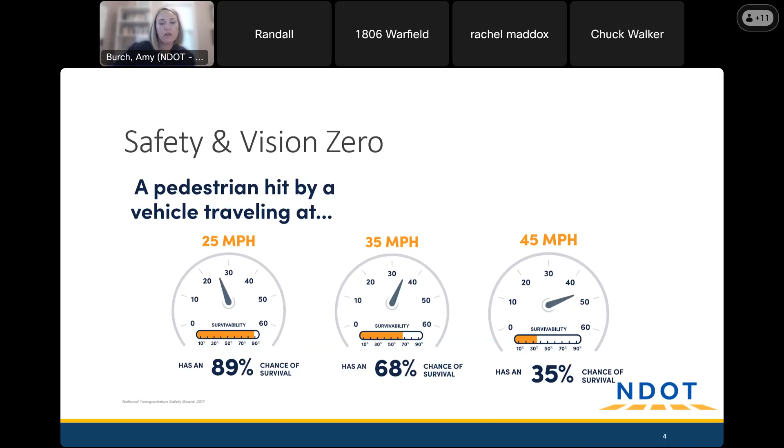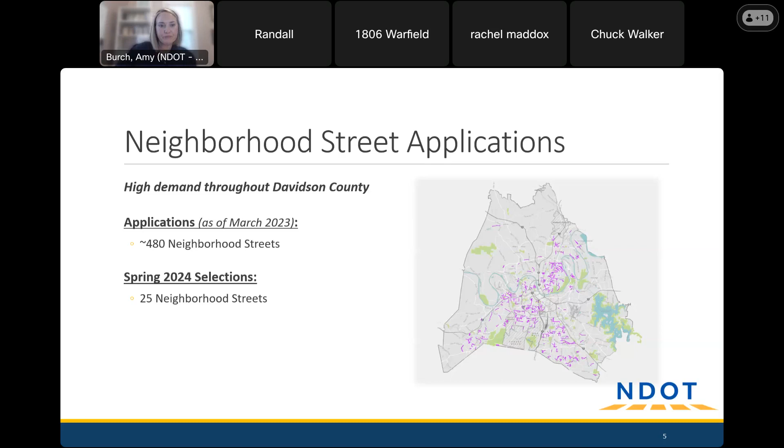Outside of the traffic calming program, we like to direct people to the Hub Nashville. If you're not familiar with it, it's a really great tool and resource for citizens to reach the correct department to address service issues, things like your trash didn't get picked up, or a street light is out, the storm drain is clogged and needs to be corrected, or a sign's been knocked down, things like that. It's a great way to reach the right department. It disseminates that information and gets the service request answered. There's also the ability to request new things like new signs and new traffic signals and so forth.

So it's not just NDOT, it's all departments throughout Nashville, and you can reach that by calling 311 or online at hub.nashville.gov. There's also an app you can download to your smartphone, and you get a service request number, something that you can follow up on if needed. So it's just a really great tool.

So let's go back to traffic calming now and talk about our prioritization process. We want to give a little bit of background about how Warfield was selected in the program. What happens is when an application is submitted for traffic calming, NDOT goes through this process of data collection and ranking streets based on these 5 criteria.

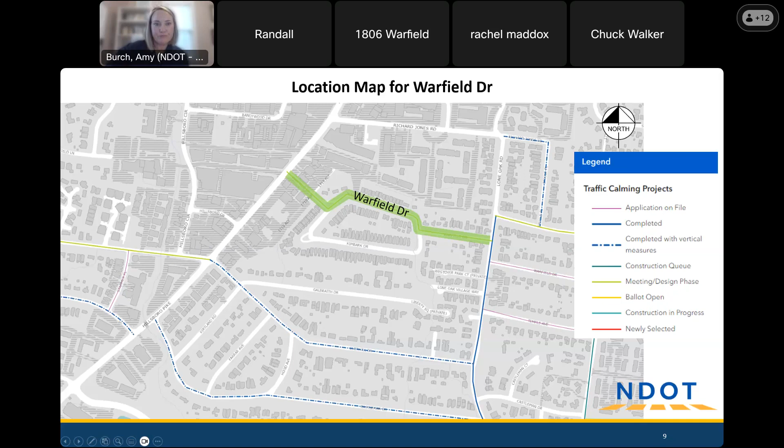Castleman being one of those, Overhill, Oriole Place. Those are streets that have completed with vertical measures, meaning speed cushions, and we'll go over those in a minute. But Warfield Drive is green, and it's in the meeting and design phase of the program. So let's talk about our toolkit real quick. I mentioned speed cushions. Speed cushions are our primary tool that we use because they're so effective. And we get a lot of good feedback that residents like them.

And so oftentimes when residents or streets apply for traffic calming, this is kind of what they have in mind, we believe, based on our experience. Speed cushions are rubber modular devices that are drilled into the pavement and formed into several different types of configurations. But the defining characteristic of speed cushions is that they have these gaps between them to better accommodate emergency vehicle responses.

So those larger emergency vehicles like fire trucks and ambulances have a slightly wider wheelbase that is more easily straddling these cushions, whereas passenger cars and pickup trucks have a narrower wheelbase and are still affected by the cushion. So that's the primary reason why NDOT likes to use this tool. So they are 3 inches high at their highest. They're 6 feet wide, and then we arrange them in different lengths depending on the street, the volume, characteristics on the street. We primarily use the 7 foot in more urban areas, and then the 10.5 foot elsewhere.

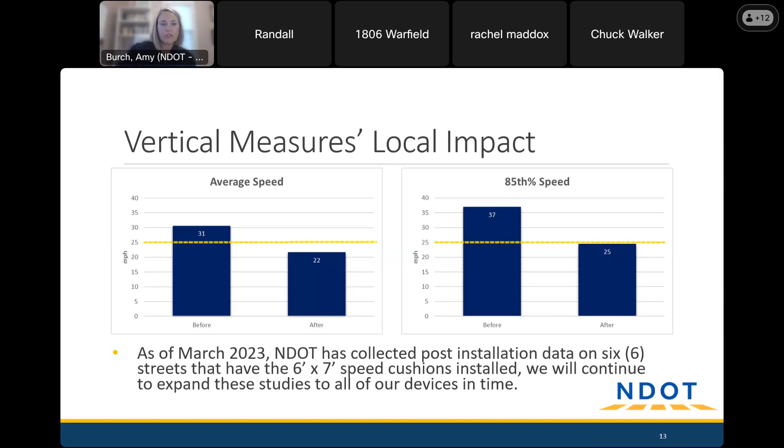And I do want to go back because I failed to mention something here about the speed cushions, and the same is true for the tables, that when we install these, there's a lot of things that we're looking at on where to locate them, but we usually install them in a series so that we get a consistent speed along the length of the street. We don't just put one set on the street and expect drivers to slow down for the length. So when you encounter these, you will usually encounter them in a series of 400 feet apart or so.

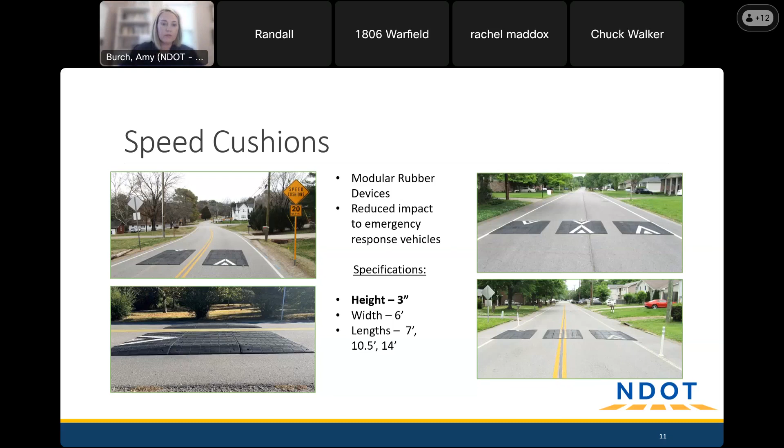And then we're also very cognizant of driveways. We try to space them away from driveways so that when you're backing or turning in and out of your driveway, you're not backing over them in a kind of angled way. So that's some of the criteria we look at, as well as vertical grade. We can't install them on steep hills or in horizontal curves of the roadway. So just want to put that out there because some of this comes into play in the design for Warfield.

So radar feedback signs is a tool we also use in this program. You've probably seen them on Lone Oak nearby, where the sign shows a vehicle's speed as the driver approaches to remind them of the speed limit and how fast they are going. We've seen some success with these tools as well, with an average speed reduction of 6 miles per hour and the 85th percentile speed coming down around 7 miles per hour. These are typically installed on streets with higher speed, or streets where we can't install vertical measures, or the neighborhood would rather see these types of measures.

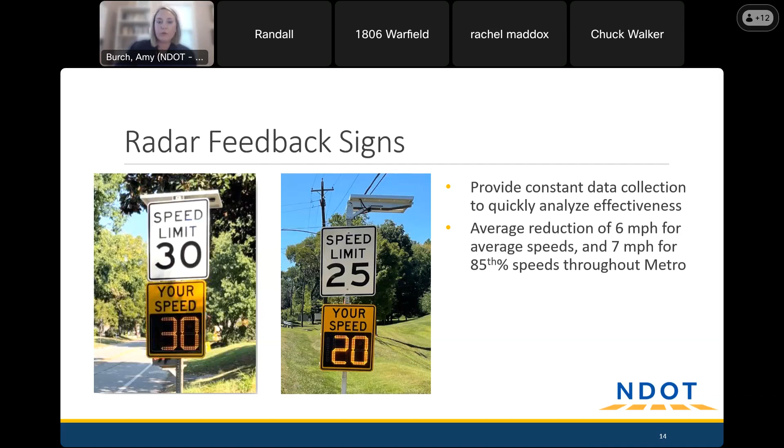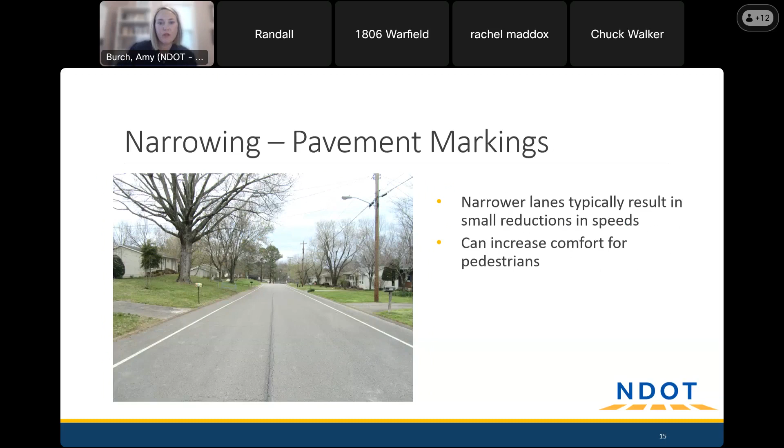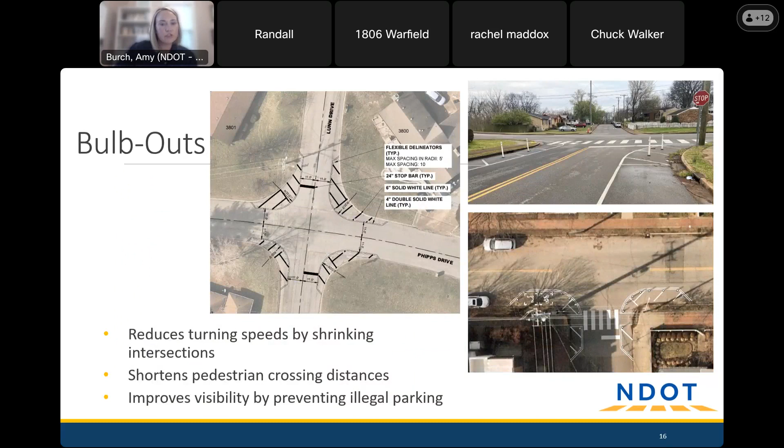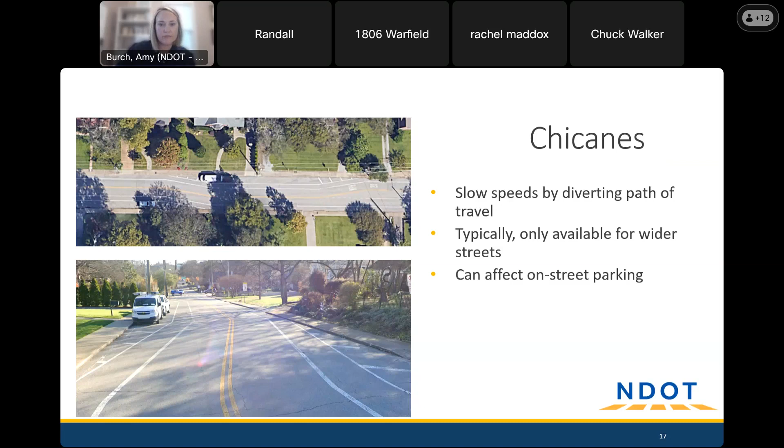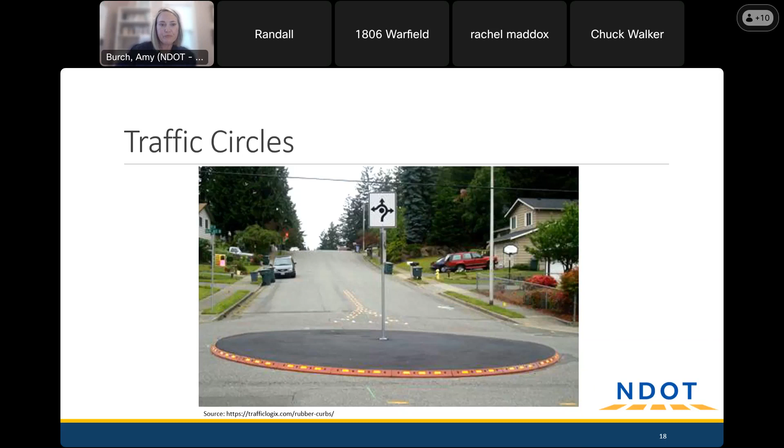So with the layout of the street, it's got some S-curves in it that we have to work around, also very dense driveways, but we do think that we could install about 5 sets of speed cushions. They're spaced at appropriate lengths, anywhere from 300 to 500 feet apart, which is good spacing to get that consistent speed along the length of the street. We're targeting that 25 miles per hour.

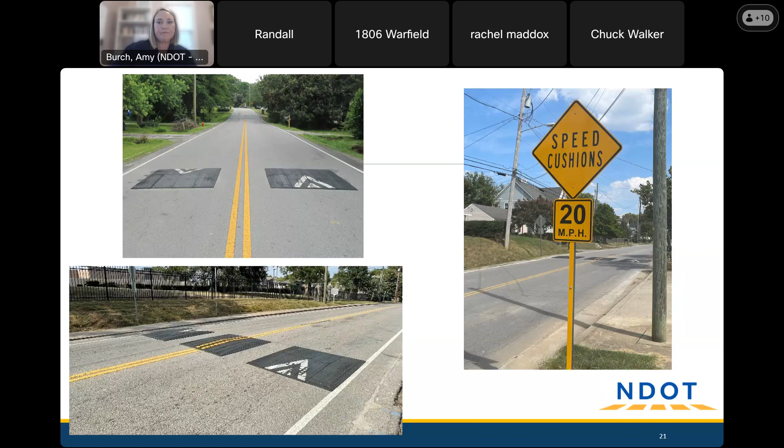These also get slightly slower speeds, we believe, because they're a little shorter and the design speed is just a little lower. And then, of course, we'll incorporate the speed cushion warning signs like you see in the picture here. So before I go further, let's see if we have any questions. Feel free to unmute, ask any questions you have. And then we'll try to answer those, and then we can talk about next steps.

Yeah, this is Pat Cooper, and I live at 1803 Warfield. I guess I'm surprised that we would be putting cushions in on the street because the S-curve that we do have is kind of a natural traffic calmer. I think you said there were going to be 5 speed cushions on this street? 5 sets is what I was saying. That just seems excessive for the street. But I think the biggest problem with our street is that we do not have sidewalks.

There is a lot of foot traffic. I love to walk around the neighborhood too, and it's very difficult on Warfield because there are not sidewalks. So I guess my question would be, if we do get these speed cushions, which it kind of sounds like that's going to happen whether we want it or not, will they be there forever? Is this a temporary thing? Are they temporary? Will we get sidewalks? I guess that's my question.

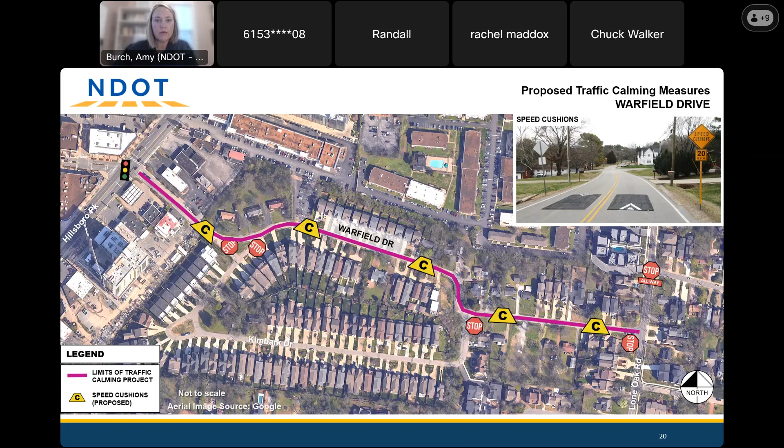In the S curves, I think something that could be looked at, because you mentioned that they're blind curves, is there some trimming and maintenance of vegetation that could be done to give better visibility around those curves? I think that might be something we could look into, depending on the right of way and so forth. But I appreciate your comments, and this might be a good opportunity for me to talk about the rest of how this program works, and the voting process. And then we can certainly come back to the plan, but I want to make sure everyone understands where we go from here. And our purpose of having these meetings is to get feedback. So if we need to adjust the plan based on the feedback we're getting at this meeting, we are absolutely able to do that within what we have in our toolbox, that is. So let me move on, and then, like I said, we can come back.

But ultimately, once we get to a design that we want to move forward with for this street and the residents on the street, then we will go into the online ballot, which is a voting process that NDOT uses to demonstrate that there is support for the plan that has been proposed. We really only do the voting for physical measures or vertical measures in the street. So speed cushions, speed tables. If we were to do traffic circles, that would be one that would require a ballot. But essentially, if it's just feedback signs or striping, a vote is not necessary. But with this vote, if 66% of those that vote while the vote is open vote in favor, then the project moves forward towards the construction phase.